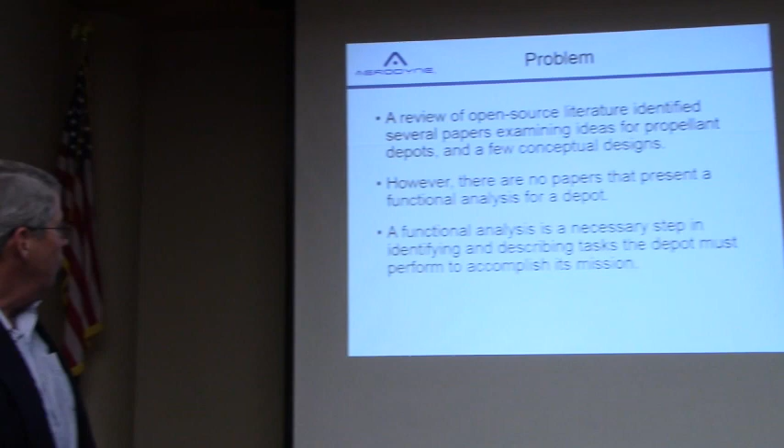One of the things I noticed over the last year or two, looking at different things in literature, is that you can look at different concepts for depots. There are lots of papers out there about depots, but I didn't see anything that went a whole lot deeper about what it would take to put together a depot. And so I wanted to look at the notion of a functional analysis for a depot, and that's what this is all about.

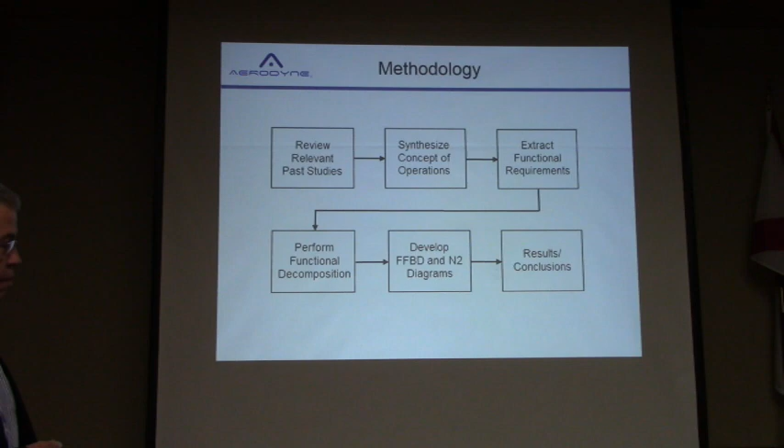This is the methodology I used. I reviewed a number of relevant past studies, and from those synthesized the concept of operations. And from that, extracted what I thought the functional requirements for a depot had to be, and then did a decomposition and developed functional flow block diagrams and N2 diagrams, and tried to draw some results and conclusions.

This is a little bit about the concept of operations. Located at Earth-Moon L1. I see it as being operated from a ground station on Earth, supplied by resources from the moon. It needs to be modular and expandable, as I assumed the demand would grow over time.

And I had this idea of mounting propellant tanks radially around a shaft. I'll get back to that in a minute, and have that shaft driven by what I call a rotisserie motor, like my father-in-law used to have this rotisserie thing on his grill, and he'd put his bird on there, and it would go over the fire for however many hours.

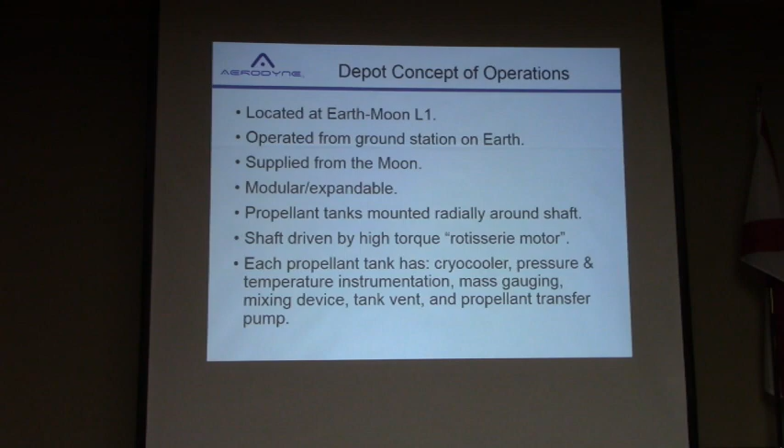Each propellant tank would have a lot of its own equipment: a cryocooler, instrumentation, mass gauging, mixing device, venting, and a propellant transfer pump. So these would be robotic LRUs, each tank? Yes. I came up with the concept and drew it up based on that in the 80s. Okay.

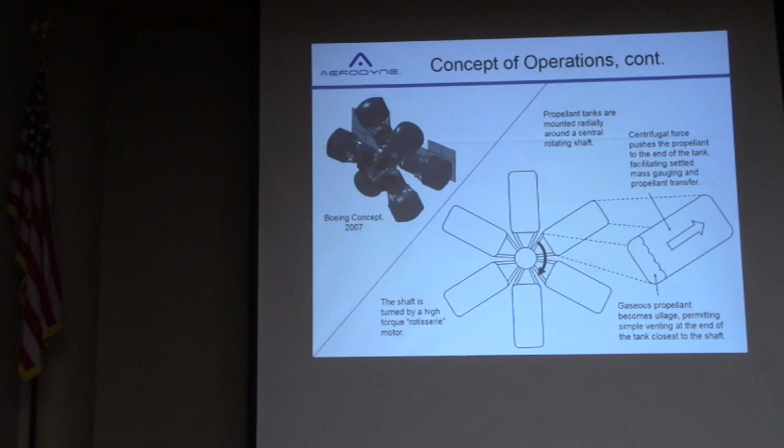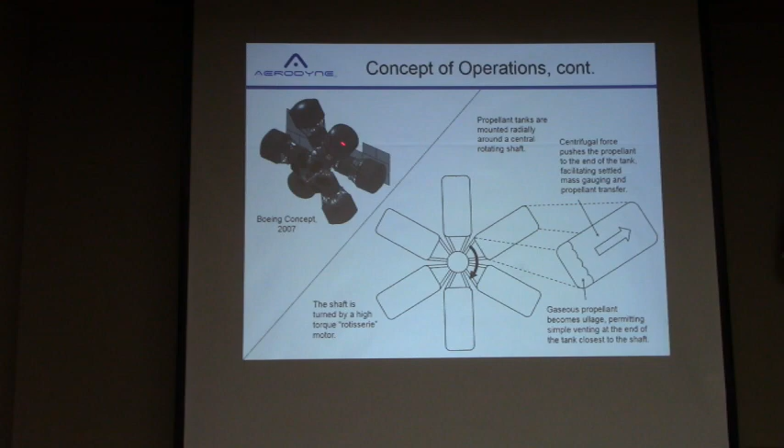This slide kind of expands on that a little bit. There's a fellow named Dallas Bienhoff who used to work for Boeing years ago, and had a briefing in 2007, this Boeing concept at the upper left. I'm sorry. And I think what he was trying to show in his briefing was just a method of construction, of taking something up, and then repurposing it once you got on orbit.

But that picture kind of stuck in my mind, and I thought, well, gee, if I could rotate that thing, then that would solve some problems, because we haven't really transferred cryogenic fluid in space in any quantity that I know of. So if you could rotate the thing, then your centrifugal force would drive the fluid, your propellant, to the outside of the tank. Any kind of gaseous propellant we'd have would be ullage, which could be vented. And so it seemed to me like it would attempt to address some of the problems that we have in handling cryogenics. So the rotational concept is yours? Yes.

So now start looking at an initial functional breakdown, in terms of functions, what it would be. What I show here in the middle, structures and mechanisms, attitude control, power, thermal. Those are systems all spacecraft are going to have.

So then I started saying, okay, what functions would I have to have for propellant operations? And so you see I've got propellant operations. It comes down here. I've defined 4 basic areas, what I call propellant maintenance, propellant receiving, propellant dispensing, and then what I've called contingency recovery.

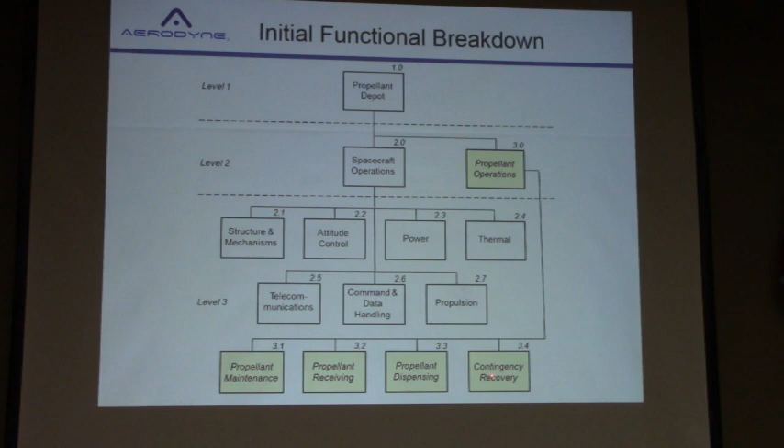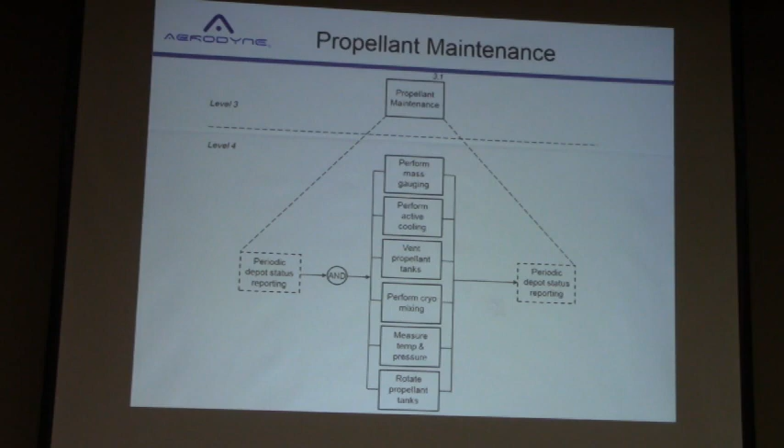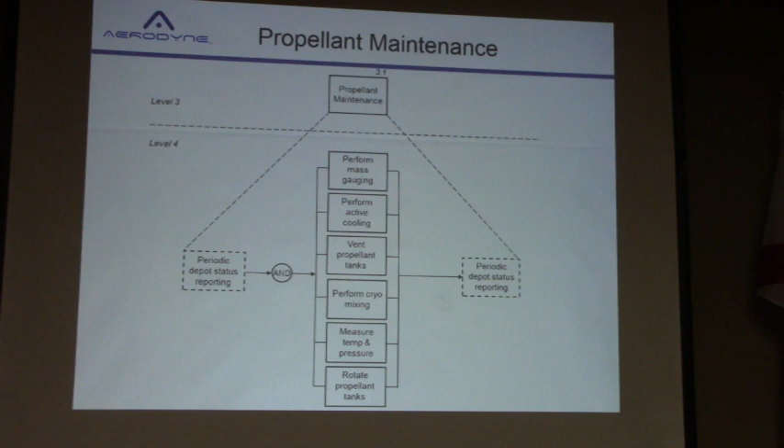Breaking those down further, propellant maintenance: obviously cryogenic liquid oxygen, liquid hydrogen, very, very cold. And so your problem is how to keep them cold and keep them fluid. So there's things that are going on all the time that the depot would have to perform. So you'd have active cooling. It's pretty common knowledge that passive insulation like MLI is not enough to prevent boil-off, so we'd have to have active cooling, cryocoolers. We'd probably have to have some way to vent the tanks.

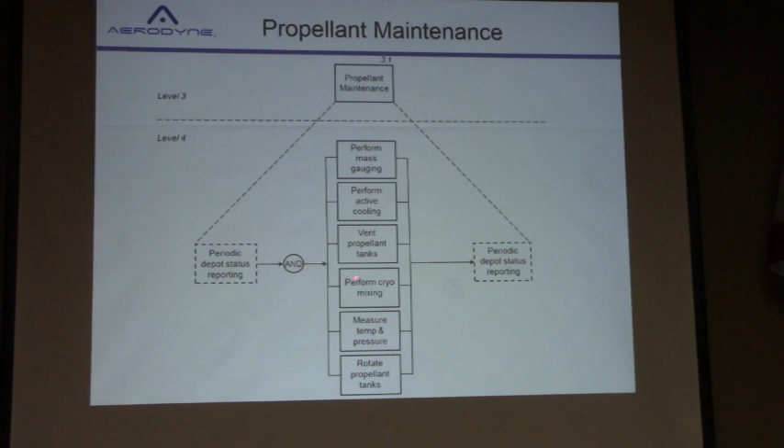We'd have to be able to mix the cryogens inside the tanks to keep the temperature uniform throughout the fluid. You need to have some way of measuring the temperature and pressure of the tank at all times. You don't want the tank to rupture from increased pressure. And I've got rotating the propellant tank, as I described earlier. And then lastly, mass gauging. Rotating the tank would allow you to perform settled mass gauging, which would be a lot easier than trying to determine how much mass of propellant you had in a tank in weightlessness.

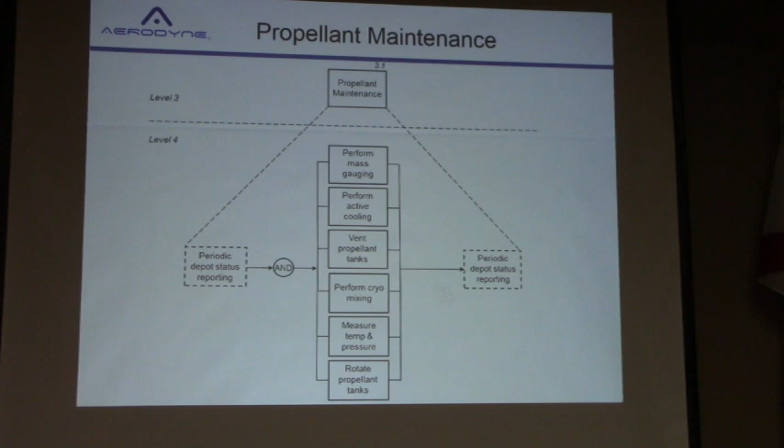So this is a functional flow block diagram. The norm for these kind of diagrams is you have a starting point and an end point. So here I'm saying that in propellant maintenance the depot is going to periodically be reporting its status to the Earth: how much propellant's on hand, what's the condition of that propellant, pressures in the tanks, all that sort of thing. And that'll go on pretty much continuously.

Did you decompose any of that, like your mass gauging function? I did not. This was the level I took it to. Okay. Obviously, that would be a next step. Contingency recovery. It says number one. The diagram's too big for the slide. Again, I'm starting in propellant maintenance, and I'm looking at possible failures that we would have on the depot.

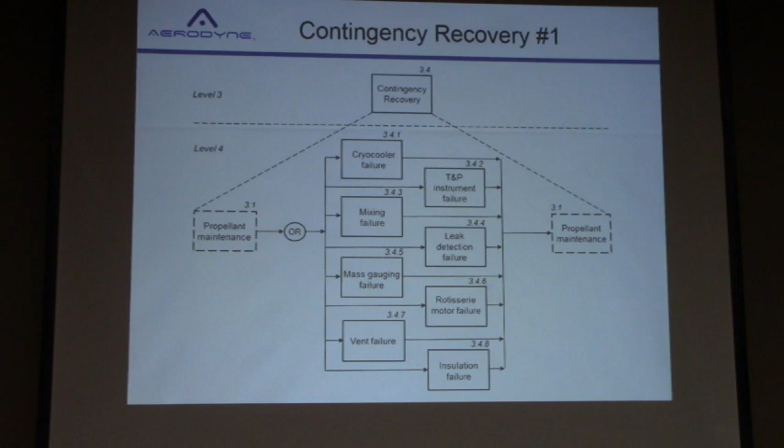Two other failures that I considered would not have as their starting point the propellant maintenance, but they would have as their starting point the receiving or the dispensing operations. And those had to do with, one, the transfer pump failure. Pump fails and I can't pump my fluid, or a vapor lock.

A vapor lock would be if you had a transfer pipe that was not properly chilled, and you go to pump cryogenic fluid through it, and it vaporizes immediately, and you have the pressure and it doesn't permit you to pump any more fluid through the pipe. So that's a double problem. So then those would be problems that you would see during receiving or dispensing operations.

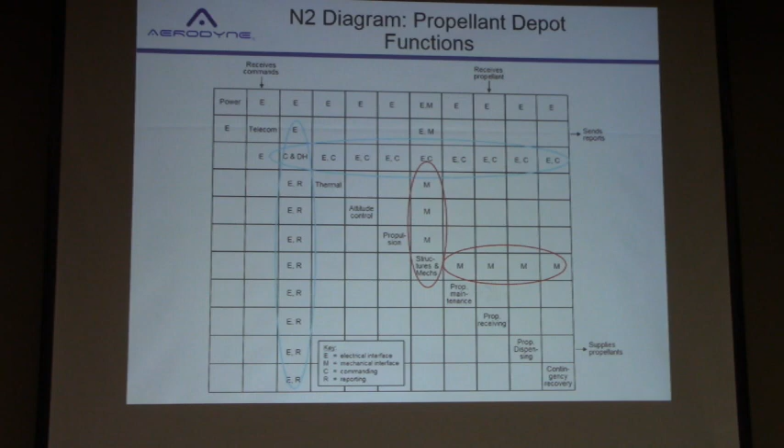At the top, the way the convention goes for N2 diagrams, you have inputs into the system at the top and outputs from the system on the side. So again, this was propellant depot functions. I did another diagram where I looked at propellant systems and subsystems. So you can see I've got mating here. I've got the CDH up in the corner, the rotisserie motor, the instrumentation, gauging, cryocooler, mixing device, propellant tank, and on.

It became very clear to me that the propellant tank is sort of the center of the action. You've got interfaces up and down the line with the propellant tank. They're either surrounding the propellant tank with interface with the insulation, or I'm doing propellant mixing inside the tank. I'm pumping something into the tank, out of the tank, on and on. There's all these different mechanical connections to the propellant tank.

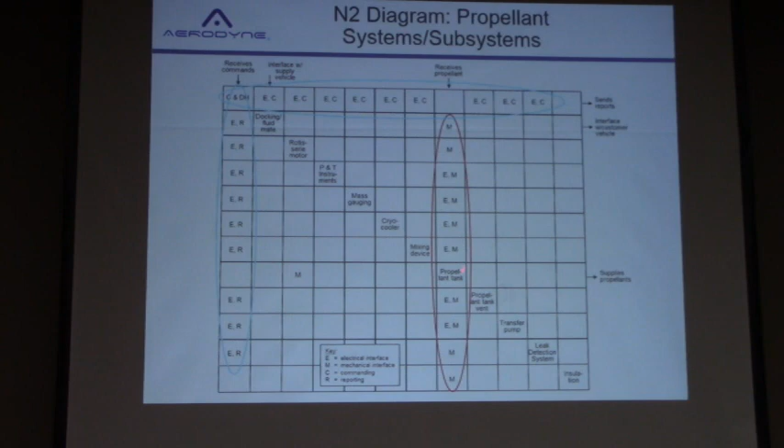Also, as we saw before, you've got the command and data handling system, and it has electrical interface and does this commanding of all the other systems, and those systems report back their status through the CDH. Again, across the top: receiving commanding, interface with supply vehicle, receiving propellants, sending reports, interface with a customer vehicle if you're dispensing propellant to another vehicle, and then supplying propellant.

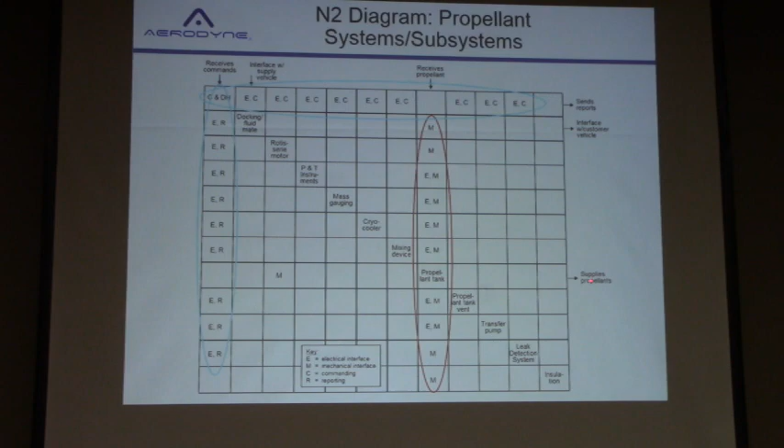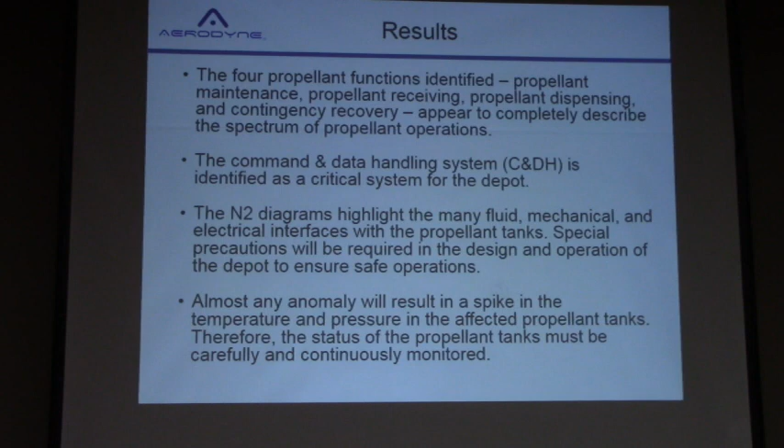It seems so easy. I mean, it seems kind of simple. It takes me, what, 5 minutes stumbling through this, but I spent weeks wrestling with this, how do you do this? So some results. It seemed to me, after all the time I spent, that the four functions I tried to identify, the propellant maintenance and the receiving and the dispensing and the contingency recovery, completely describe the spectrum of the operations. I couldn't think of any other thing that might go on that wasn't covered under those four areas.

Second thing was pretty obvious, that C&DH is a critical system for the depot. Third, the diagrams highlight the many fluid, mechanical, and electrical interfaces with the propellant tanks. And I thought, gee, you got a propellant tank, and I got mechanical things going into it, I got electrical things going into it, and that's kind of scary. But it's in a vacuum, maybe it's not the hazard I think it is, but it's kind of scary. So maybe special precautions will be required in the design and operation to make sure you have safe operations.

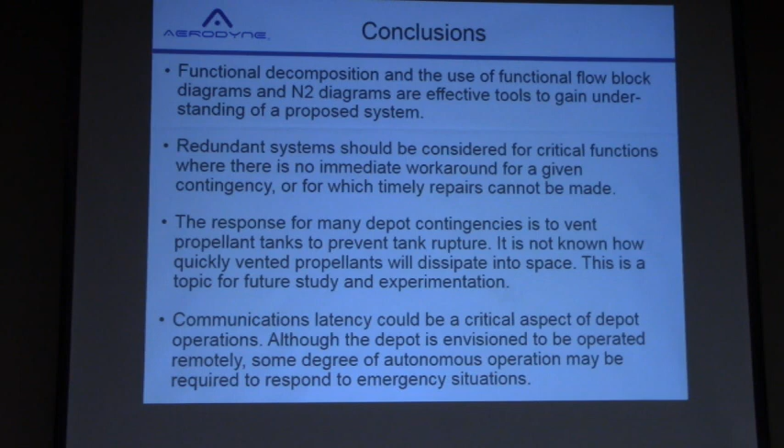The other thing that jumped out over and over again as I looked at the various failure modes: almost any anomaly, whether it's a mixing failure or a cryocooler failure, or penetrations through your insulation, is going to result in a temperature and pressure spike to the tank, which means you probably end up having to vent the tank to make sure you don't have pressure too high. So it's pretty clear that the status of the tanks has to be continuously monitored all the time, just to stay on top of it.

Conclusions. I felt like the functional decomposition and the diagrams were pretty good tools. I gained some understanding of what I was about. Secondly, redundant systems should be considered for critical functions where there's no immediate workaround for a given failure. Third, the response for many contingencies is to vent the propellant tanks to prevent tank rupture. Somebody asked me, how fast is the vented propellant going to dissipate away from the depot? Don't know. Don't know if anybody knows. Would it be a problem or not? So I saw that as a topic for future study.

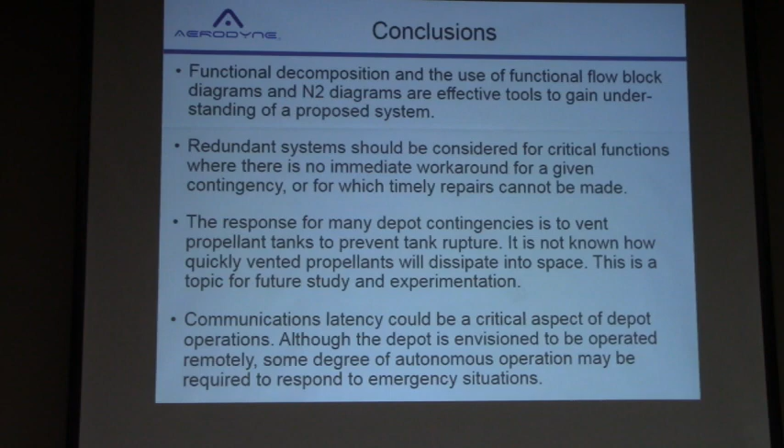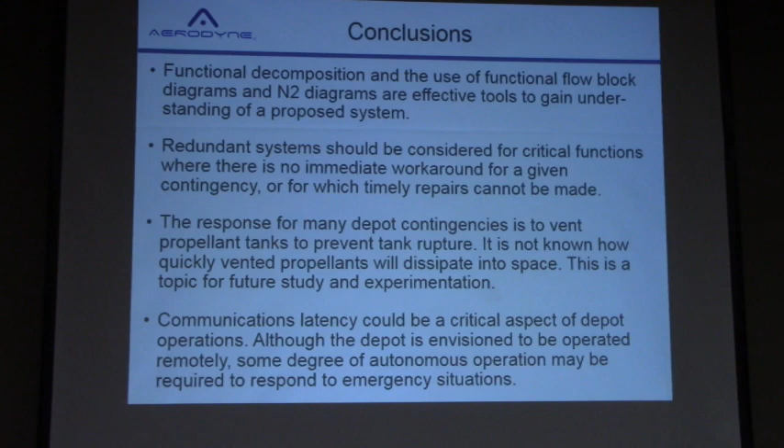Another thing somebody pointed out is that you have commanding from the Earth. That takes about a second of communication latency back and forth. There might be a condition where that second could be really critical. So although it's envisioned to be operated remotely, maybe some sort of autonomous operation might be required to respond to some emergency condition. And there you have it. What questions or comments do you have, please?

If you have to vent gas or liquid, probably a gas, that'll act like a jet. It'll give a force, which can affect what's happening. Good thought. So you'd have to have RCS to compensate for some of that, and for attitude control. So was attitude control part of your decomposition? As a function? Not as far as decomposition, I thought I had it as one of the N2 diagram functions.

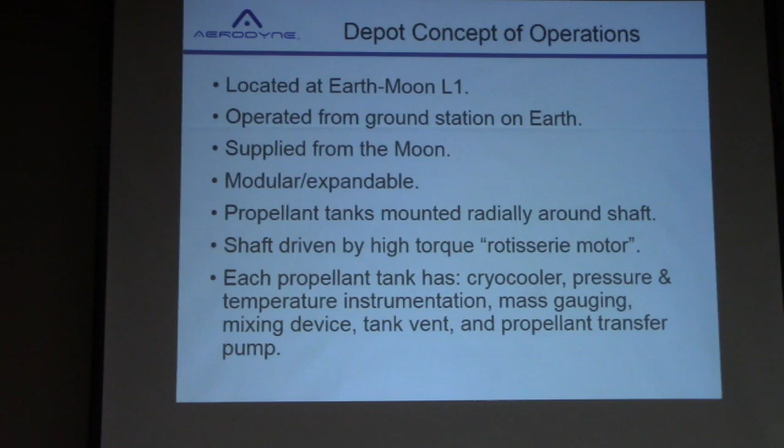I thought I had it on here, but I forgot and left it off. It's one more slide. One slide forward, or two slides forward. There you go. Or no, one more slide. I saw something in there about attitude control. Next one? Yeah, it's in there. There we go. It's part of the regular spacecraft functionality, of course, but he's right.

And I also had one person mention to me that maybe you could use the venting as a way of doing attitude control. You know, vent into an ACS thing. And I thought about that, and it just seemed too hairy to try and attack it head on. So I thought, well, I'll put that away for a while. But that's a really good point.

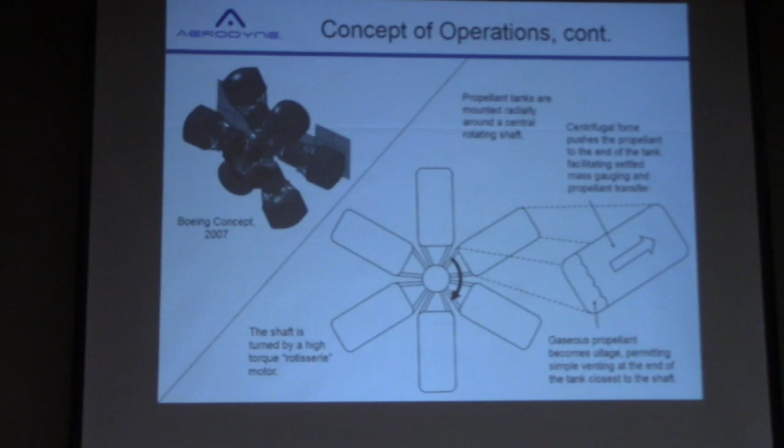Another point is that the diagram sort of hints that the tanks will be the same size. Well, they can be. If you had 3 hydrogen tanks for every oxygen tank, you could have them about the same size, but the mass of those tanks will be quite a bit different. So if you're going to have these things rotating around the shaft, you're going to have to say, how do I make sure things are balanced? So there's all kinds of issues.

Another issue is if I'm going to spin this thing and drain it, I'm going to service the customer and drain the tank from the outside edge of the tank. What does your piping look like? What kind of piping and manifolding? That could be really hairy. And then, of course, all that stuff would have to be cooled before you can push anything through it. So there are lots and lots of issues. The basic idea seems okay, but the devil will definitely be in the details, how you can make it work.

Yes, sir. So one of the first things I think about is safety: what if one of your tanks explodes under whatever conditions, whether it's a meteor impact or whatever, then what does that do to your other tanks? How are you going to prevent that effect from propagating? Failure propagation. I didn't even consider that. Propagation is what we call it. Also, you unbalance your centrifuge as well. Oh, yeah. So you'd have to halt rotation first.

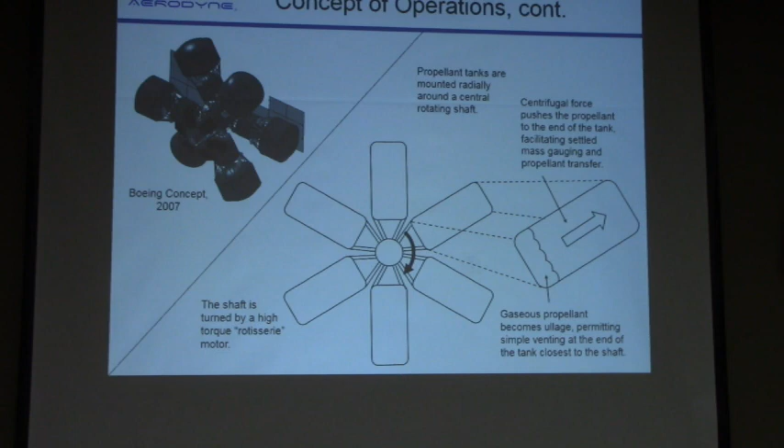Trade study space. Does anyone recognize those tanks on the Boeing concept up there? Yeah, they're like Delta 4 upper stages. They look like the ICPS on the SLS, which is a Delta 4 upper stage. Right, exactly. That's where I did come from.

Well, thanks for letting me come. Great, thank you. When they first asked me about this, they said, we have to get advertising out, but advertising for me? Any other questions? Anybody have any other questions for the speaker? So are you going to do a sequel to this, or another study?

I don't know. Hey, I did have a question. I see a lot of open questions that you could continue this and get a PhD off, but. Two or three. See that lady in the pink right there? I think she'd have something to say about that. It sounded like cuss words, didn't it? You ought to know.

Yeah. Actually, what I'm interested in looking into right now is, if you buy off on this idea of the lunar economy based on water, then rocket engines, liquid hydrogen and liquid oxygen are going to be the name of the game. I had a professor at North Dakota who, by the way, drove a Volkswagen Beetle, probably a 30-year-old car. And he pointed out to us more than once that there would be a need for a rocket engine that was like his old Volkswagen. Dead simple, dead reliable, maybe trade specific impulse, lower performance for high reliability.